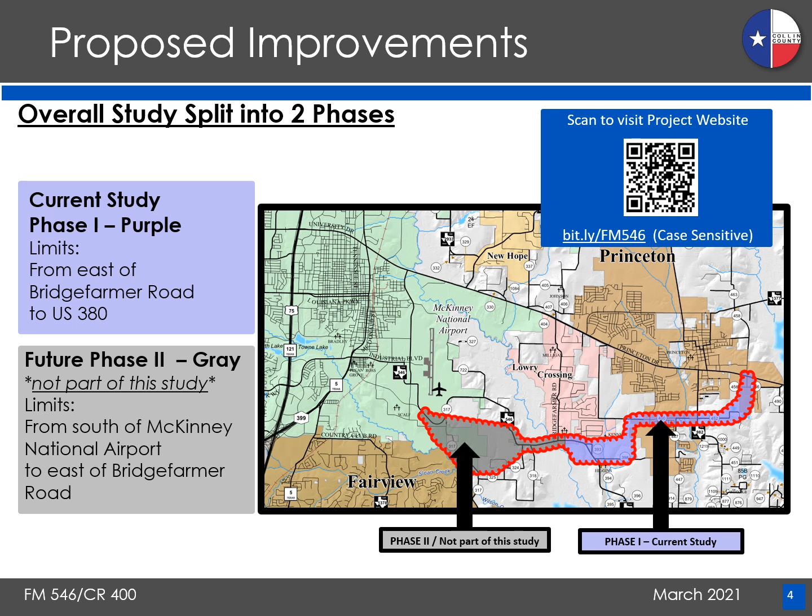The proposed improvements consist of 4 12-foot lanes, 2 in each direction. Travel lanes will be divided by a raised concrete median with dedicated left turn lanes where appropriate. The center median allows room to construct 1 additional lane in each direction for a total of 6 lanes in the ultimate condition as warranted by future increases in traffic.

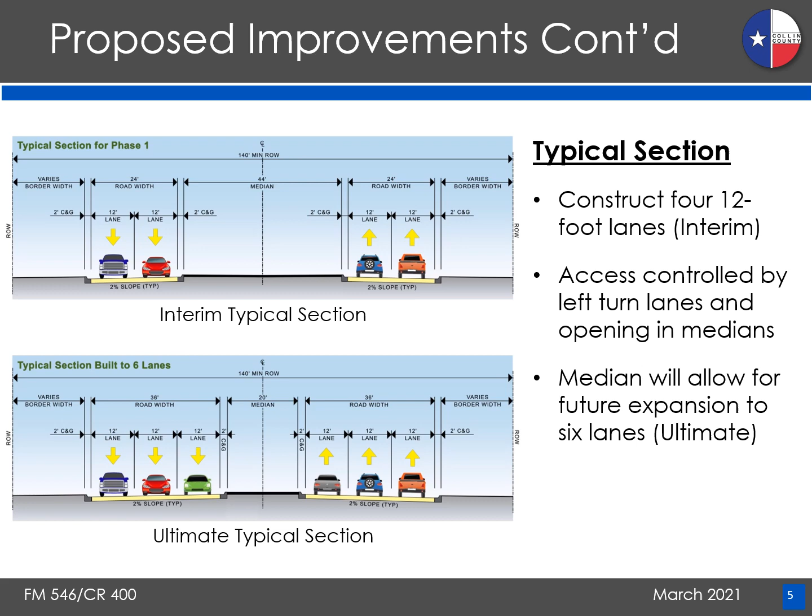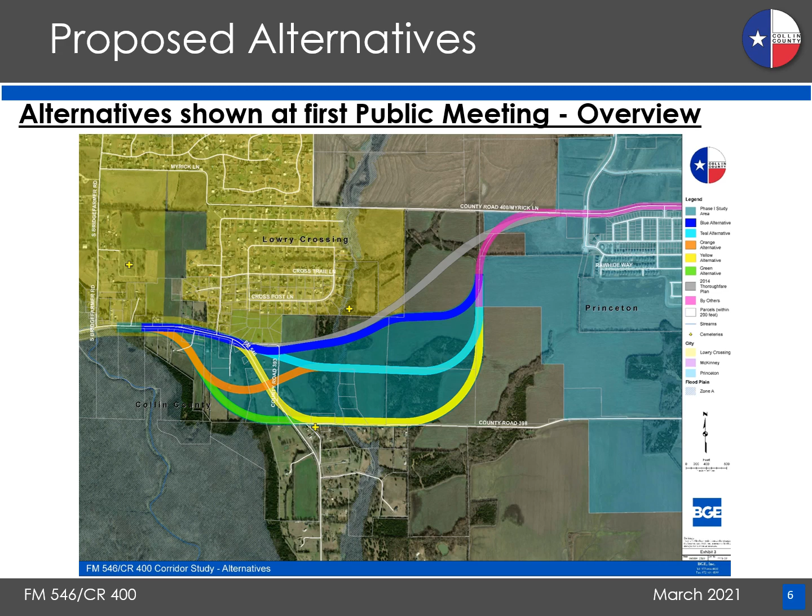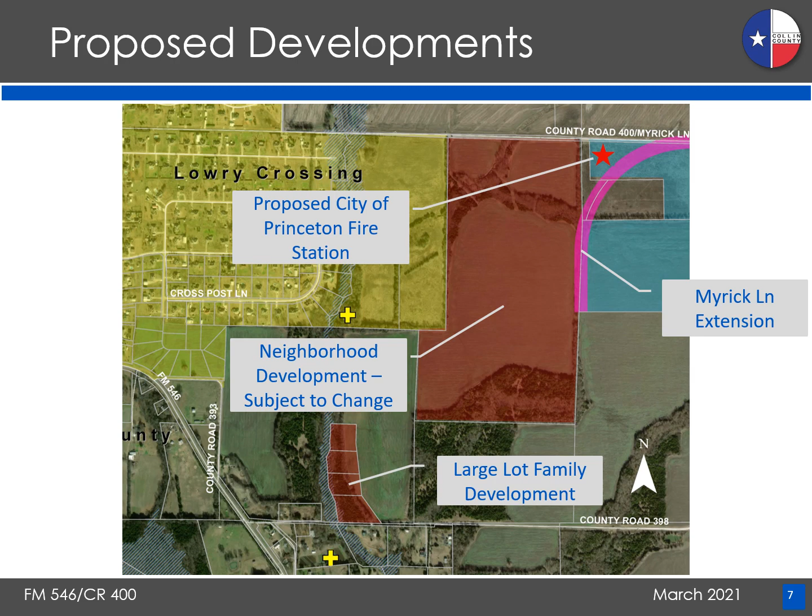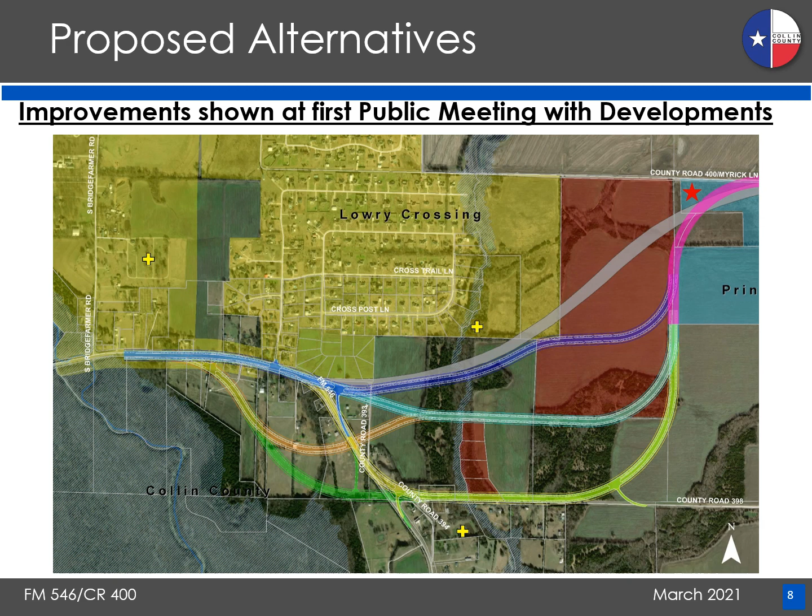Here, the same alternatives are shown with the overlapping proposed developments. The alignments shown were further developed by the project team, both horizontal and vertical roadway design, to allow for the detailed development of the comparison matrix criteria data used to score the alignments. The matrix focused on 5 specific categories for comparison of impacts by each alternative. They include environmental, engineering and constructability, public and stakeholder input, utilities and right-of-way, and construction cost.

The scoring system used for the comparison of alternatives used a scale of 1 to 5 based on the severity of the impact, with 5 having the most impact within each category. The scores were then added together to obtain a total score for each alternative. The least impactful alternatives will have the lowest scores and are shaded green. The most impactful alternatives will have the highest scores and are shaded red. Alternatives with moderate impacts are shaded yellow.

The results for each category will be covered in the next several slides, showing the scoring for each alternative and subcategory based on engineering and environmental data and analysis by the project team. The process utilized follows guidelines set forth by the National Environmental Policy Act of 1969, or what is known as NEPA.

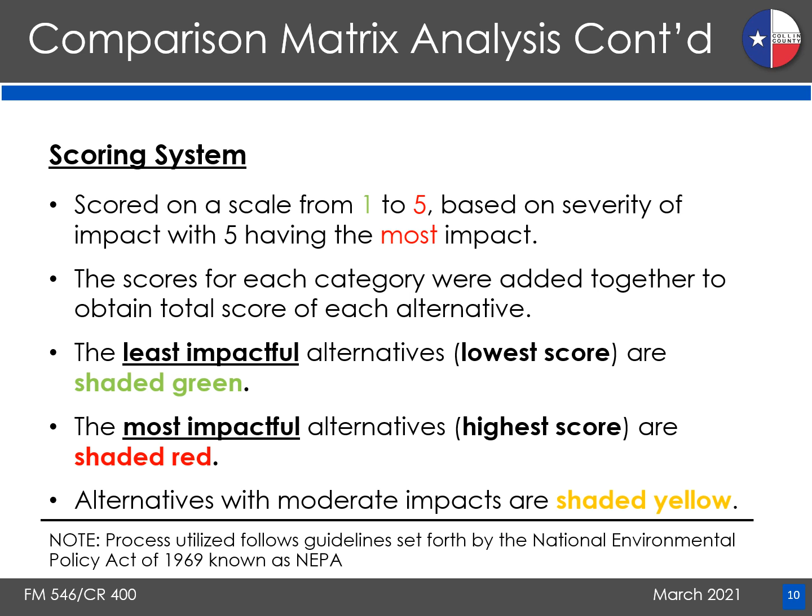The first category was environmental. Subcategories included the number of parcels each alignment impacted, the number of structures displaced, the acres of land and acres of farmland impacted, potential for impacting a cemetery, and the indirect impacts the alternative would have. Indirect impacts include acreage of unusable tracts of land left behind, or impacts to property usage or functionality as part of an alignment damaging a property or properties.

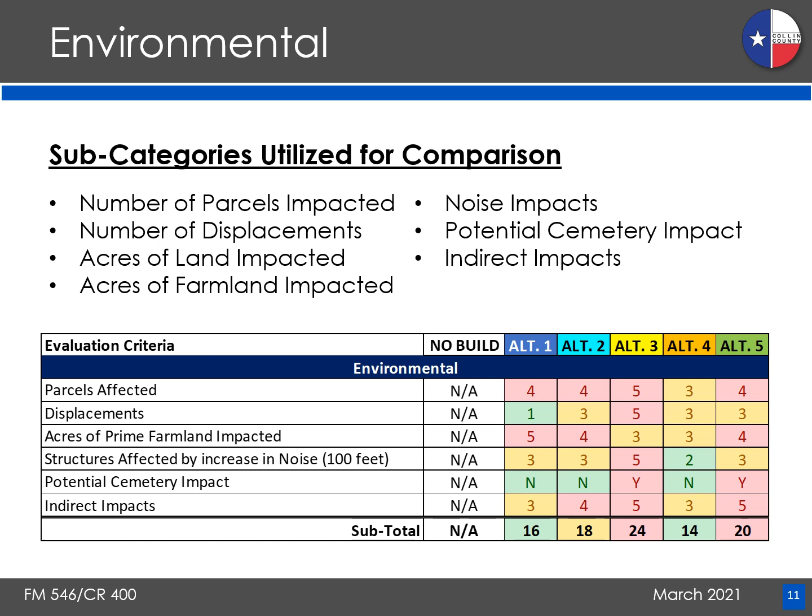Summarizing environmental subcategory impacts, the orange alignment, Alternative 4, was least impactful, followed by the blue alignment, Alternative 1. The yellow alignment, Alternative 3, scored as the most impactful alternative.

The next category was engineering and constructability. Subcategories included safety and operation of revised intersections, the engineering design speed of the alignment, driveway impacts, construction sequencing, drainage impacts, and how each alignment impacts the current construction and extension of Myrick Lane. Summarizing engineering and constructability subcategory impacts, the teal alignment, Alternative 2, was least impactful, followed by the green alignment, Alternative 5. The yellow alignment, Alternative 3, was the most impactful alternative.

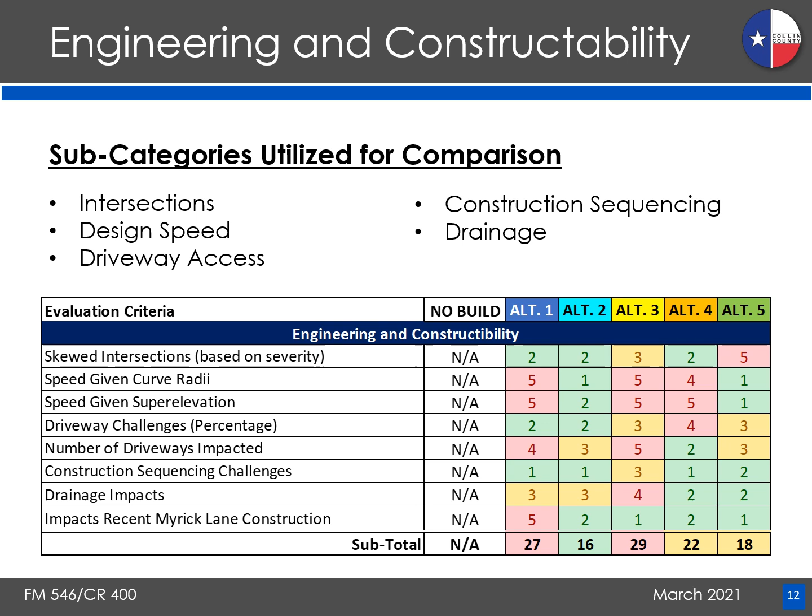Impacts to utilities and right-of-way were also analyzed in our matrix. The subcategories included land acreage needed for the right-of-way to construct the proposed facility, along with impacts to electric poles and recently installed utilities on the north side of FM 546 near Lowry Crossing, Texas. Summarizing utilities and right-of-way subcategories, the blue alignment, Alternative 1, was the least impactful. The yellow and green alignments, Alternatives 3 and 5, were most impactful.

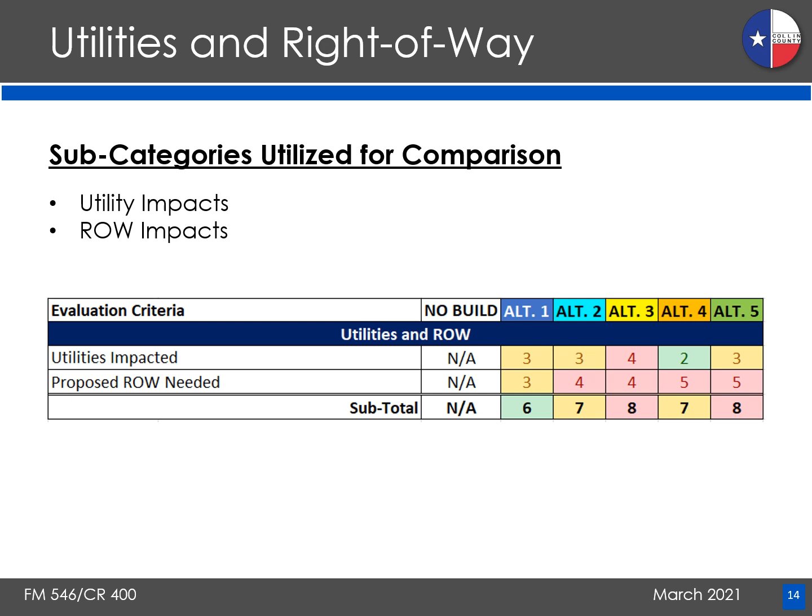Finally, a cost analysis was included, consisting of comparing conceptual cost estimates for each of the alternatives. The higher the cost of the proposed alignment, the higher the score or impact. The blue alignment, Alternative 1, and the teal alignment, Alternative 2, were least impactful, while the yellow and green alignments, Alternatives 3 and 5, were most impactful.

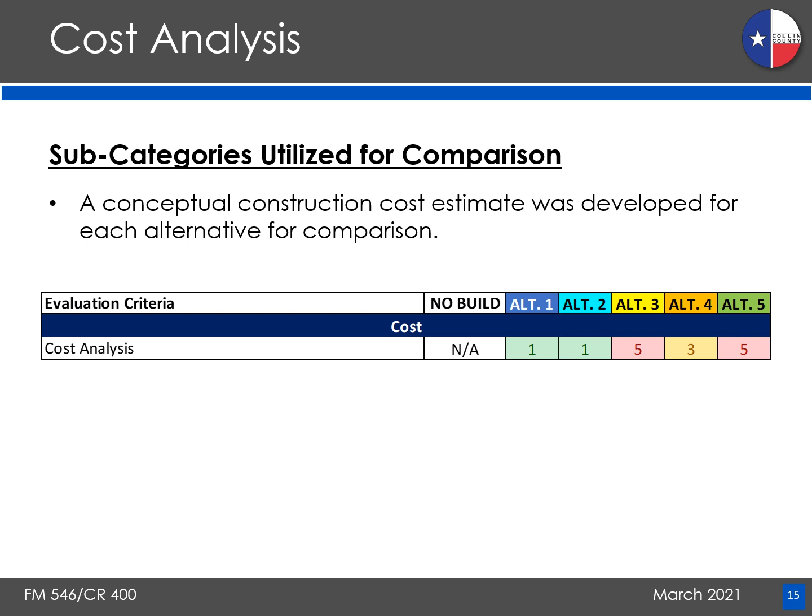The scores of each category were added together to get a final combined score for each alignment alternative. Based on the combined results of the 5 categories, the teal alignment, Alternative 2, was the least impactful alignment when compared to the other 4 alternatives.

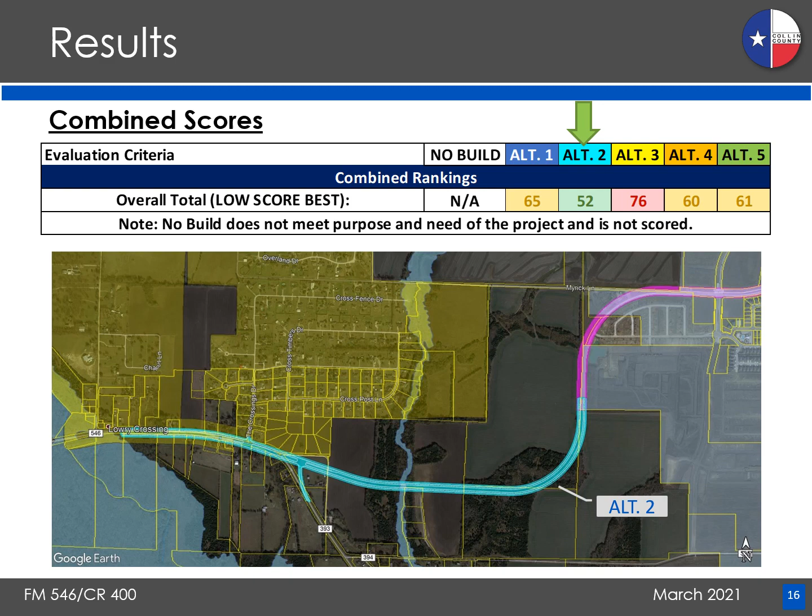Please note that the no-build alternative is an option that means nothing will be constructed and no future improvements would be made. This option does not meet the purpose and need of the project and therefore was not included in the scoring process as a valid alternative. This alternative automatically moves forward as an option in lieu of a recommended alternative moving forward into subsequent stages of project development.

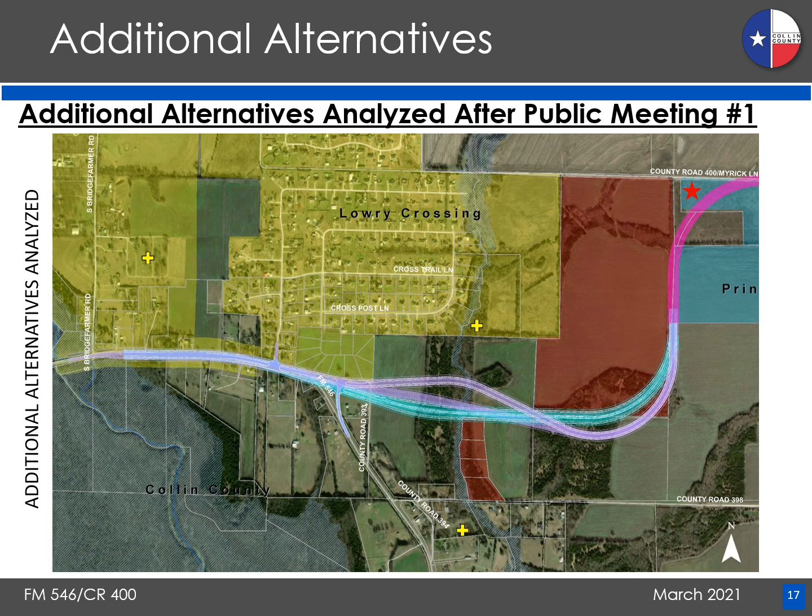Once the teal alignment, Alternative 2, was identified as the least impactful alternative through the alternatives comparison matrix, it was further refined by developing additional alternatives in coordination with property owners and other stakeholders. 3 new alternatives were considered to attempt to improve upon the teal alignment, Alternative 2, as shown. Alternative 6 was developed as a combination of Alternatives 1 and 4, or the blue and orange alternatives. The goal of this alignment was to avoid new or planned developments as much as possible.

Alternative 2-1 is similar to the teal alignment, Alternative 2. The beginning of the alignment, as it departs from existing FM 546, was shifted north slightly to attempt to miss an existing structure and to avoid impacts to the new large lot family development just to the south of the alignment. Alternative 6-1 is a combination of new Alternative 6 and 2-1 with smoother horizontal curves proposed. It was developed to avoid impacts to the new large lot family development and to minimize impacts to the newly planned neighborhood development just west of the Myrick Lane extension.

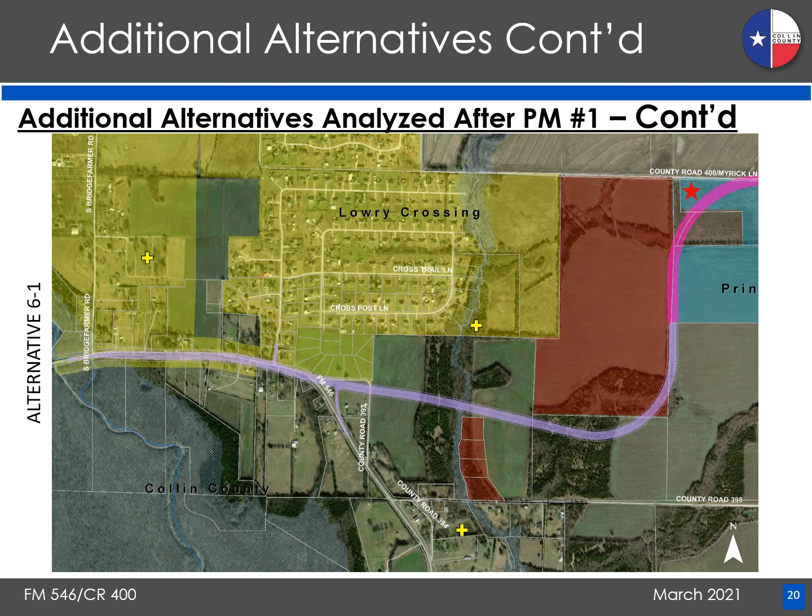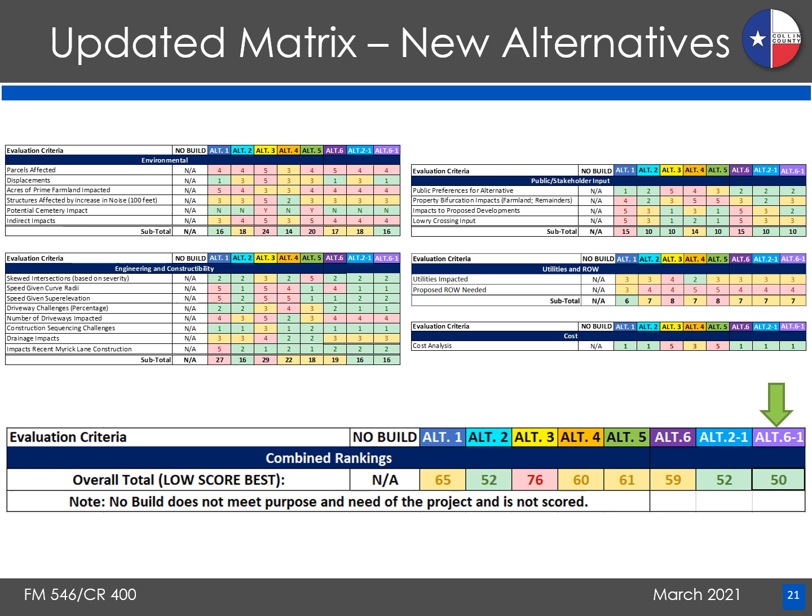The 3 new alternatives were analyzed through the same scoring process as the previously proposed alternatives. The data was added to the alternatives comparison matrix using all the same categories and subcategories. After totaling all the scores for the 3 new alternatives and comparing them to the previously developed alternatives, Alternative 6-1 became the least impactful alternative. Based on this analysis, Alternative 6-1 is being proposed as the recommended alternative to move forward in the project development process.

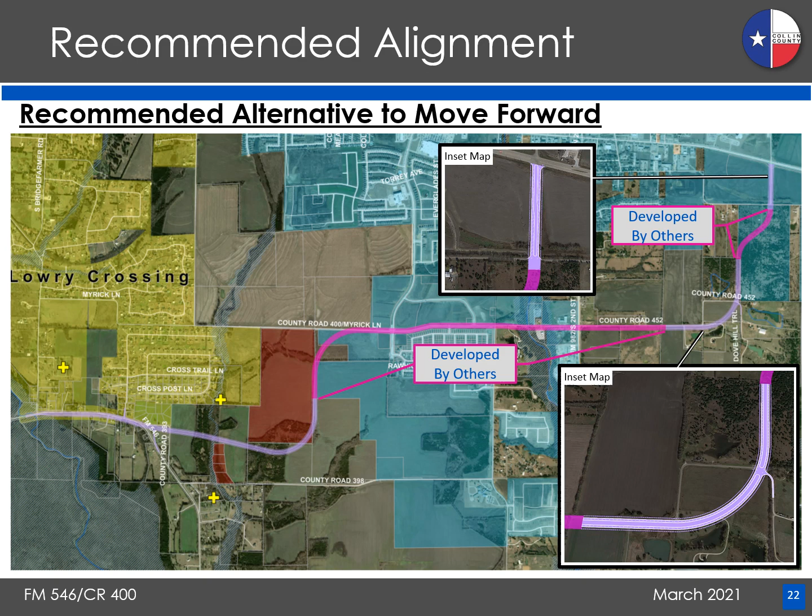developed by others. In conclusion of the alternatives section of the agenda, Collin County is asking for your input or comments on both the process used to identify the recommended alternative and the recommended alternative as proposed. Again, public and stakeholder input is a valuable part of the corridor planning process, and we thank you for your time and input. The following slides will cover the remaining project schedule and all the various ways you can give feedback to the project development team.